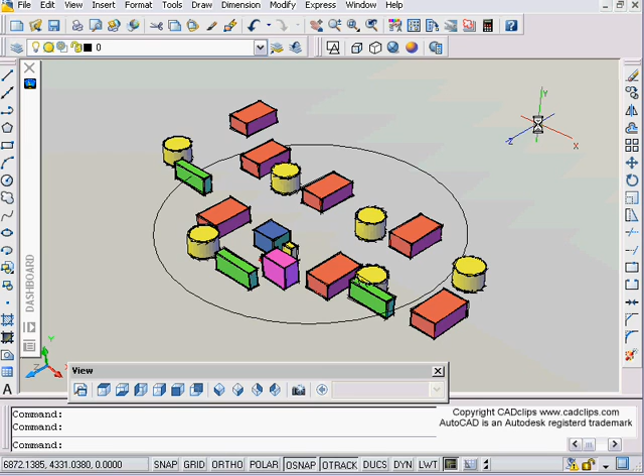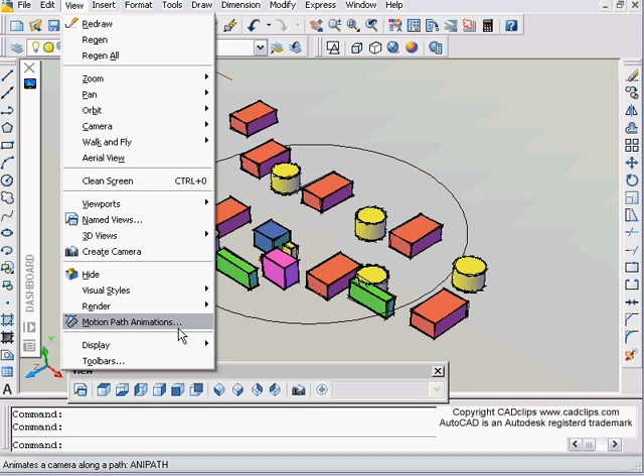In this lesson we're talking about the motion path animation stuff, which is really exciting, and we can see lots of use for that right away. So we'll go in there by clicking on our View menu and going down to Motion Path Animations, and you can see there's dots after it, which means a dialog box is going to come up, and inside of there you can see there's the camera information, the target information, animation settings,

frame rate, duration, etc. The first thing I usually do is bump this up to be about 30 seconds, and then you'll see that the number of frames adapts based on frame rate per second. If you know a little bit about video, you can start to play with these numbers. The main thing is camera, link camera to: I can either give a point with a moving target, or a moving camera with a static target, or a moving target, or moving path, or we can say none.

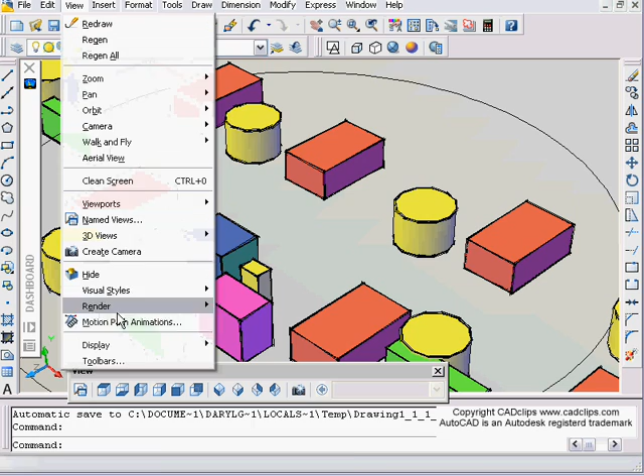So basically, as we create this animation, there's the camera and there's the target and how they're going to behave. So I'm going to say link camera to the path, pick point. I'm just going to pick that circle and hit OK. Then I'm going to say link target to point and hit OK, and pick a point. Oh, what happened? Point here. And then pick a point just in the middle and hit OK. Then I'm going to do my path again because it lost that information.

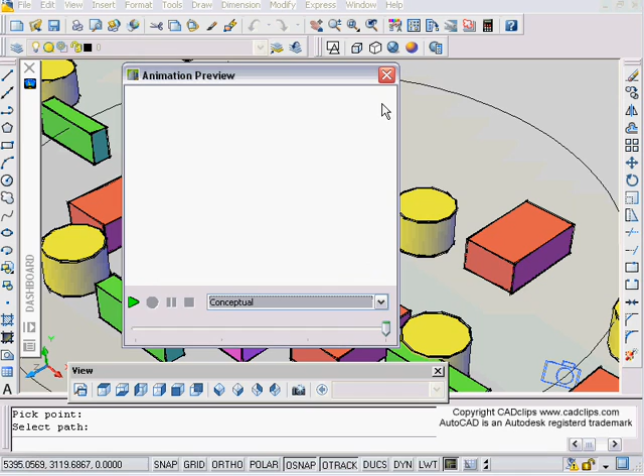We get a name and we can record these and use them. And then we can do a preview, and it's going to show us a preview of that. Now that didn't look like I saw it very much, so let's hit cancel and do target point again. I'm going to use pick point, and make sure I snap to something like that. Then I'm going to do a preview, and it goes by really fast, and that's because this got reset.

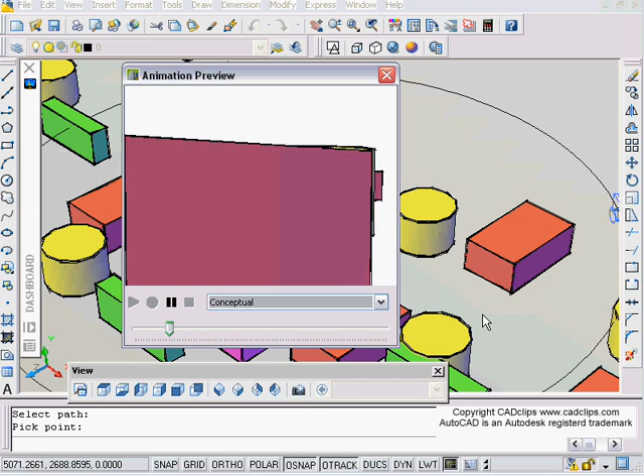So I'm going to reset that back to make it a 30-second video preview, and you can see the camera, just like at the racetrack, moving along and showing us all that information. It just so happens that I'm using a circle as my camera path, and I can hit escape anytime. Then if I hit OK, I can save that as a WMV file, which is how all my videos are made. I was thinking you could save as an AVI, but in this animation it's only WMVs. When we do our fly and walk lessons later and we record, we do have a different choice.

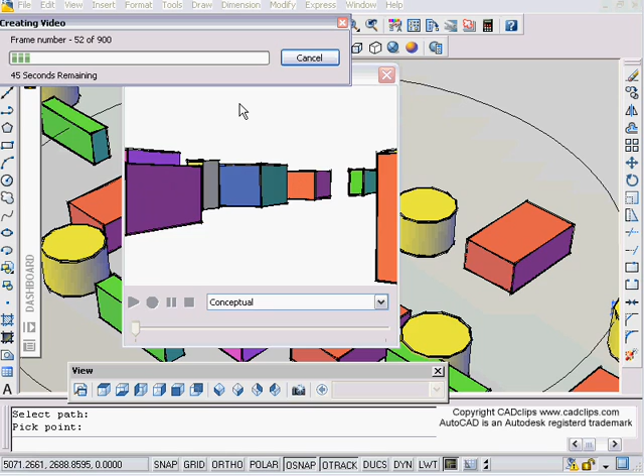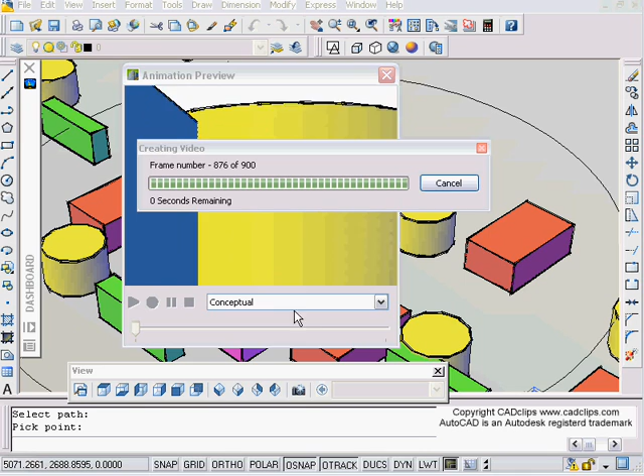So I can save that file, and it's going to go out and create that file for me. You have to be careful because some of these files end up being really big. We've skipped ahead here, almost at our 900 frames, and after that's done, we can take that file and send it out to a client or use it for whatever purposes we wanted. It's a file now on our hard drive, or we can put it on the network or wherever we want, and use that animation file.

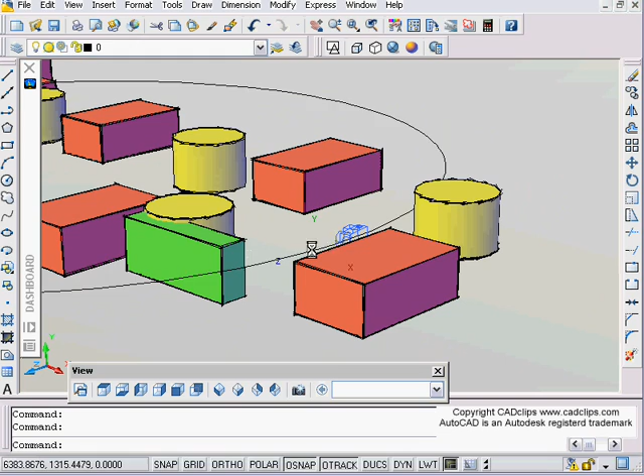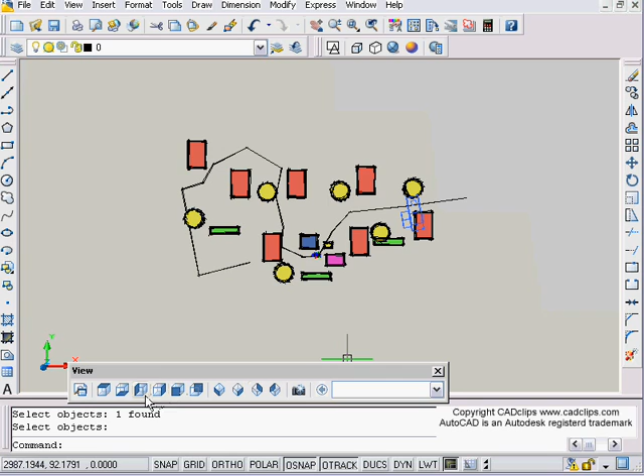The other thing I should note is, with shift middle mouse button, notice where that circle is. It's not sitting flat on the ground, right? Because your camera view needs to get up a little bit. So I'm going to go back to my top view. You can also use a polyline. I'm going to type PL and draw a polyline. I could make this go wherever I want around. I'm going to erase the circle. Now I'm going to go to my front view, take that polyline, move it up a little bit, and go back to my 3D view.

Now I can go back to View, Motion Path, and say link camera to path and pick on this object, hit OK, and then say the target is also a path, which is the same object. Hit OK, then do a preview, and you're going to see the camera kind of follow along there. I'm going to hit cancel on that. Maybe I'll make that a 10-second video instead. Do a preview. It's going to go through,

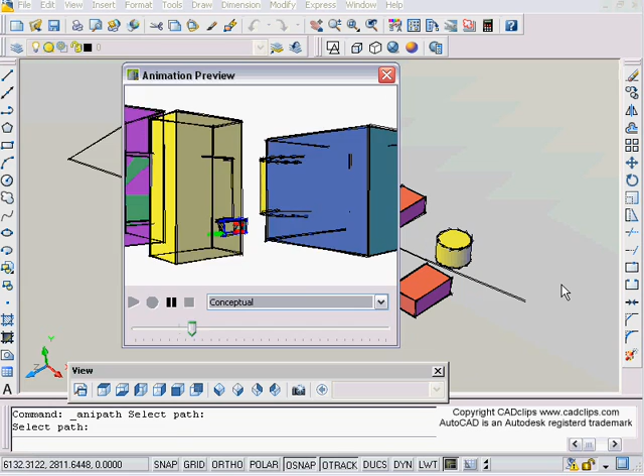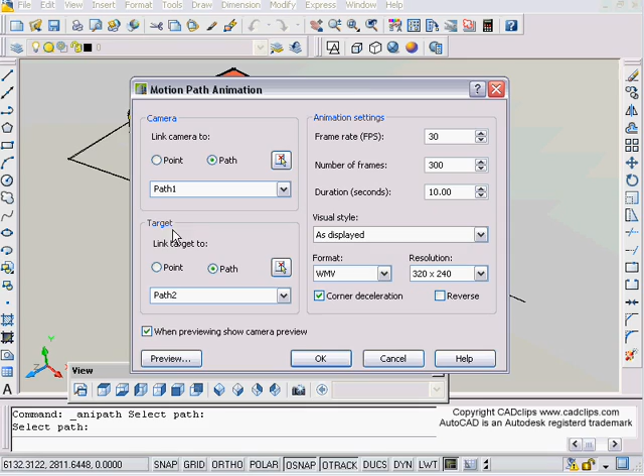all around there. And of course we have our different display types that we can view this in: current view, 3D wireframe, or realistic, whatever we want inside of that preview. And again, if we hit OK, we can save that out as its own file. So it's a matter of going in and playing with some of these settings and targets and paths. Different people have different applications for creating these animated motion pictures.

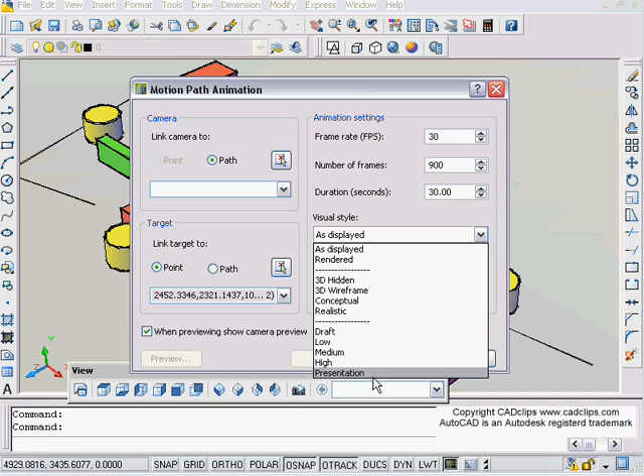Oh, and one last thing inside of here. You can reverse this if you want, so the camera will go backwards. And then we have corner deceleration, which means that as it goes around the corner, it will decelerate so that it's not so sharp. So a couple extra settings, and of course we can pick our resolution. And oh look, we can change between AVI, MPEG, and WMV formats. And then we have our display that we can put in there as well.